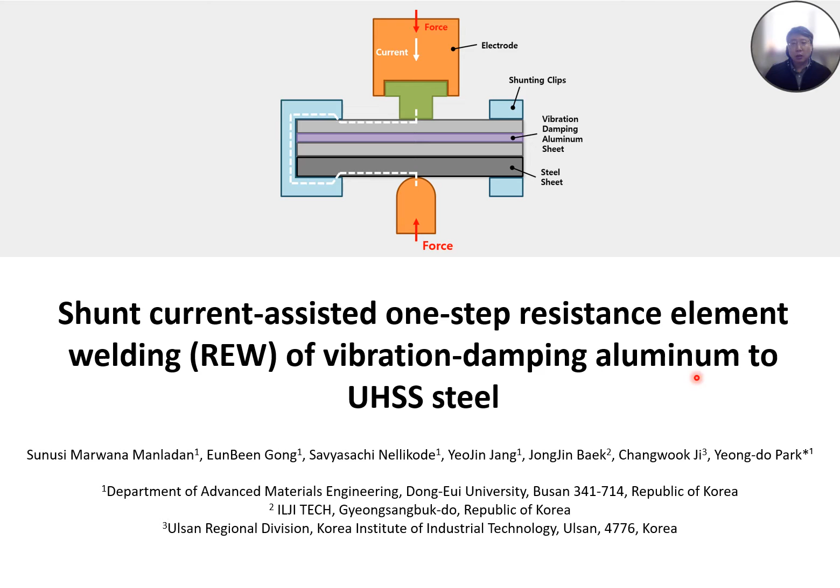Today I'm going to talk about the shunt current assisted one-step resistance element welding (REW) of the vibration damping aluminum to ultra-high strength steels.

My presentation will be composed of introduction, motivation, objective, experiments, results and discussion, and summary.

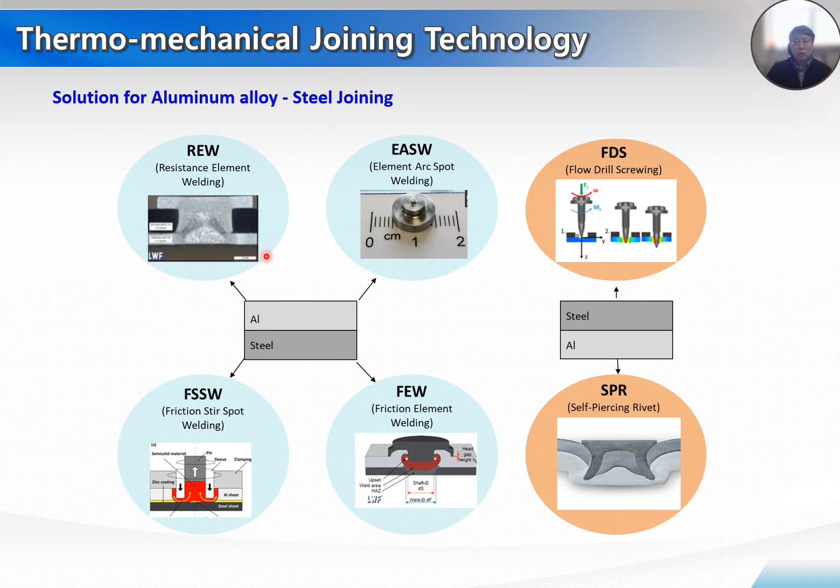Many mechanical fastening methods have been developed and applied to join aluminum and steel dissimilar materials. In particular, when aluminum is the upper plate and steel is the lower plate, the representative method is resistance element welding, and other methods such as friction element welding, FSSW, and EASW are also applicable. When steel is the upper plate, FDS or SPR can be applied. In this research, we mostly focused on the resistance element welding side.

Resistant element welding involves mechanical fastening using an element. The element is welded to the lower steel plate using the resistance welding process. Therefore, it combines the advantages of mechanical joining and thermal joining principles. It can be understood as a thermomechanical joining technology, combining the advantage of mechanical joining, which is the form fit, and thermal joining, which is the metallurgical bond. It is applicable to a wide range of dissimilar materials, such as aluminum-steel joints, magnesium-steel joints, carbon fiber reinforced plastic and steel joints, and aluminum-titanium joints.

Here, aluminum of 1.5 millimeter thickness has been joined with hot stamp steel using an element with resistance heating. The very large nugget diameter secures the bond strength between the element and steel. At the same time, the element head presses down the aluminum plate, which works as an interlocking mechanism for joint strength.

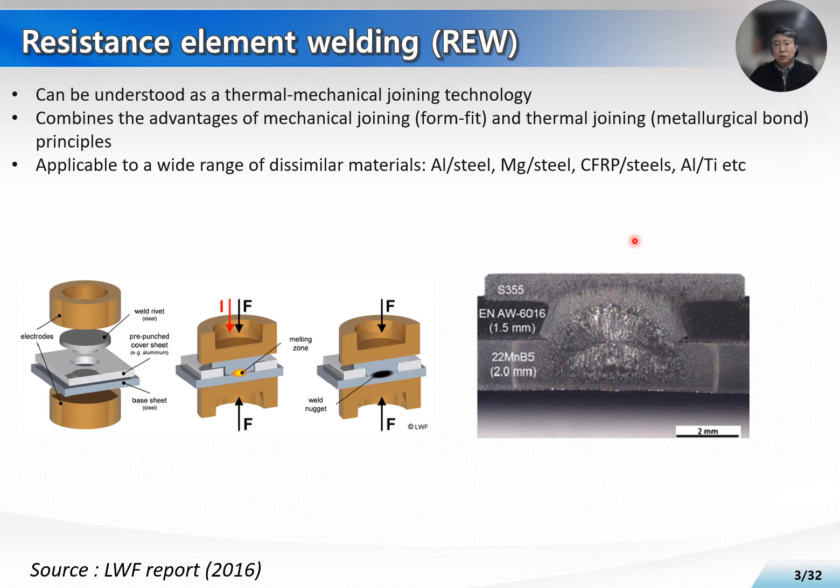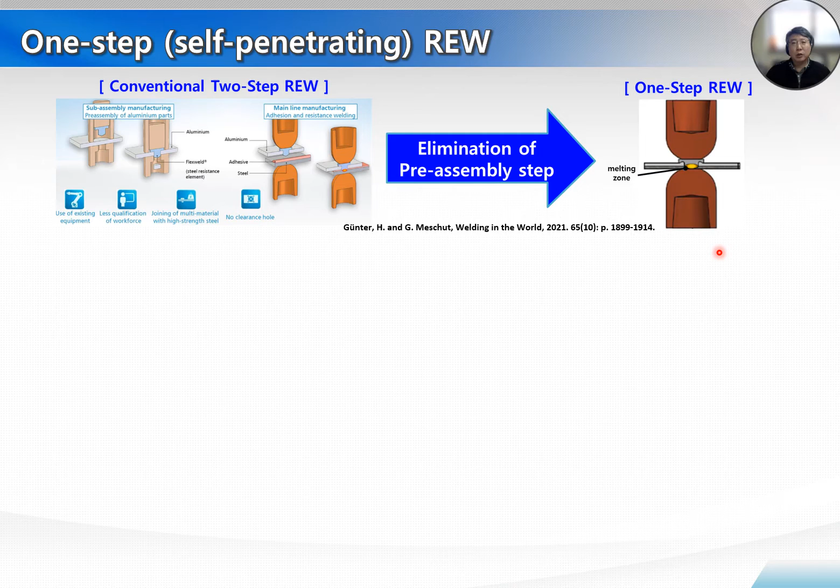Resistant element welding is a two-step process. The first is sub-assembly manufacturing, where the element is punched and inserted into the aluminum plate, and the second is mainline manufacturing, where the element and lower steel plate are resistance welded. However, in these two steps, it is difficult for a robot to find the exact location of the elements in mainline manufacturing, and the possibility of weld defects increases. Therefore, one-step REW resistance element welding was proposed, which omits the pre-assembly step and starts from mainline manufacturing by punching or piercing the element into the upper aluminum and simultaneously performing resistance welding with the lower steel in one step.

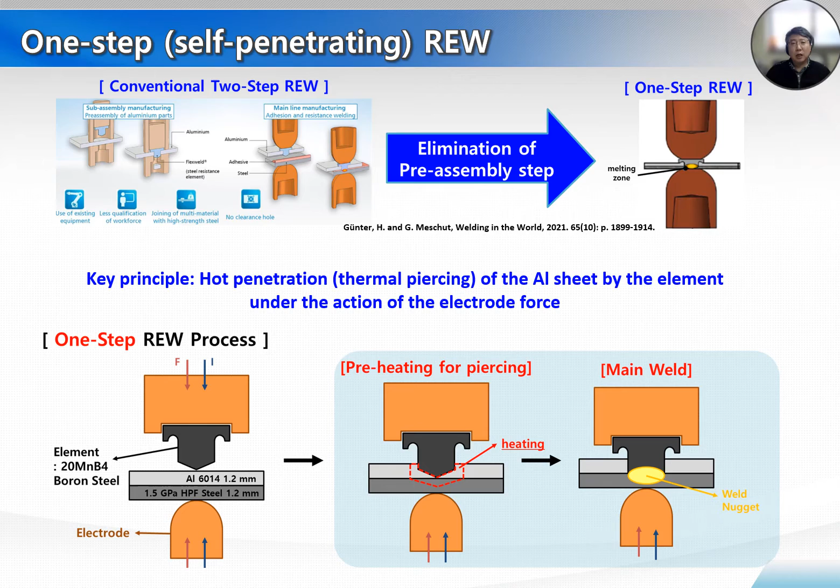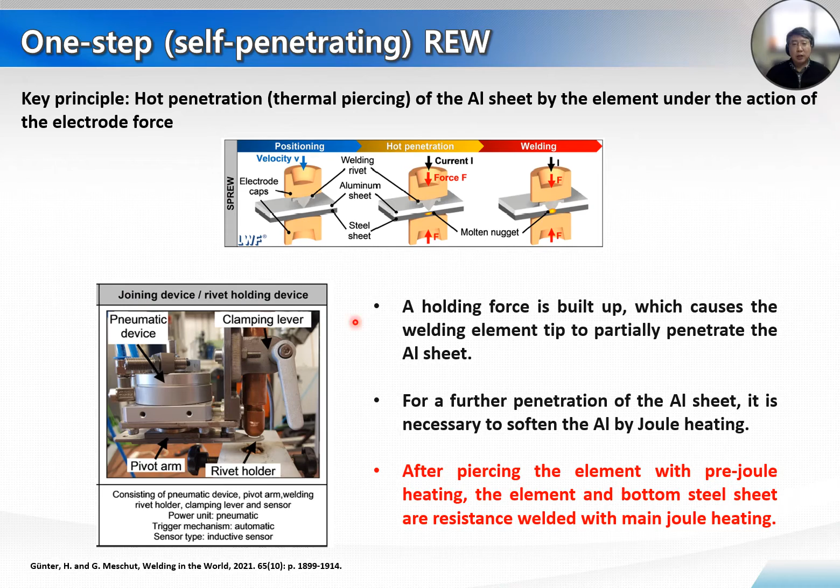In the case of one-step resistance element welding, the preheating process of aluminum sheet piercing using a special jig device and the main welding process are carried out continuously. The proposed one-step resistance element welding device consists of a variety of systems, including our existing resistance welding gun system, an element supply device, and a device that places the element onto the electrode. After piercing the element with pre-Joule heating, the element and bottom steel sheet are resistance welded with the main Joule heating. However, its use is somewhat limited to date due to the complexity of the jig system.

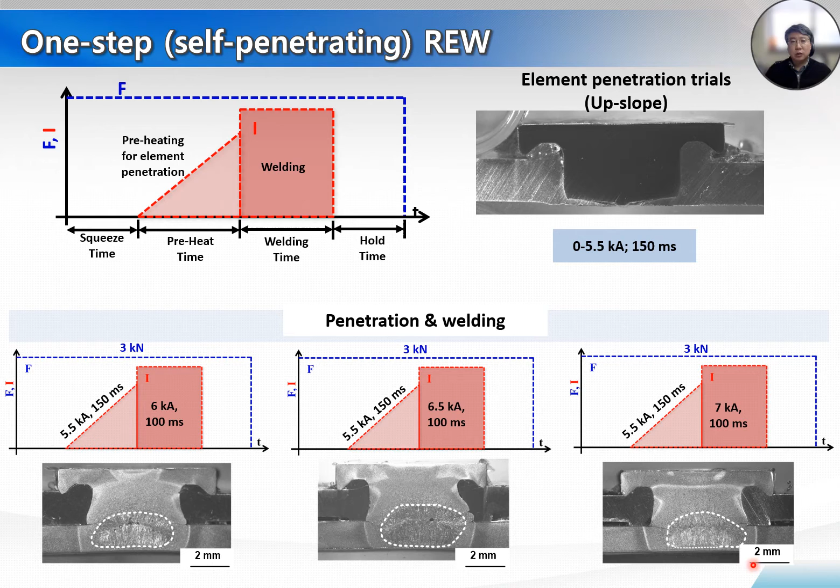In our laboratory, we also implemented a one-step resistance element welding process into a simple system. We applied the current profile of the preheating step using current upslope, as suggested in various literatures, and main welding constant current applied to secure successful fastening. In particular, when the main welding current increased, the nugget size of the resistance welding area increased and joint strength also dramatically increased.

With all this information about one-step resistance element welding in mind, here is the motivation of this research. A sandwich-structured aluminum panel with a thermoplastic layer between two aluminum sheets improves the noise, vibration, harshness properties. The assembly is made by joining this aluminum sandwich panel with thermoplastic into a steel plate. Our laboratory proposed a two-step resistance element welding process for this. However, in the two-step process, quality problems such as delamination of the sandwich panel occur during the pre-assembly step of punching the element into the upper aluminum plate.

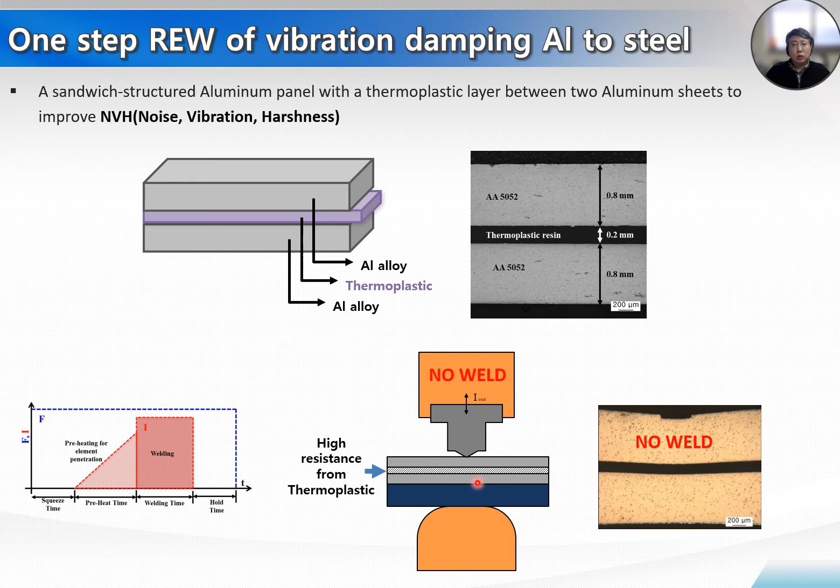So we attempted to solve this problem by applying one-step resistance element welding. However, due to the high resistance of the thermoplastic present within the sandwich panel, it was impossible to conduct current for the resistant welding.

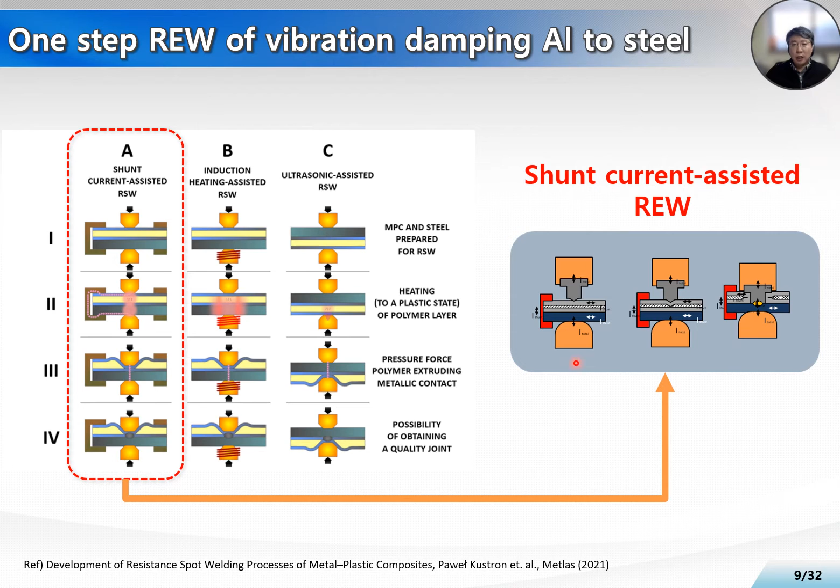Various methods were investigated to solve the problem of non-current conduction in resistant welding. In the literature, three approaches were presented: shunt current assisted resistance welding, induction heating assisted resistance welding, and ultrasonic assisted resistance welding. Among these three methods, after reviewing them, shunt current assisted resistance welding was found to be quite an appropriate approach. We finally proposed shunt current assisted resistance element welding. The following is the objective of this research.

The first objective of this research is the feasibility study of the developed shunt current assisted resistance element welding process to weld between the vibration damping aluminum and steels.

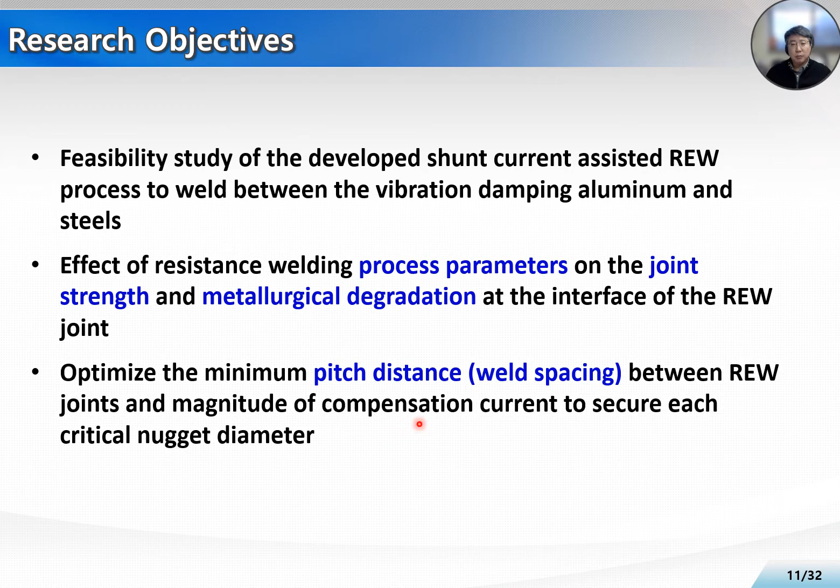Second, the effect of resistance welding process parameters on the joint strength and metallurgical degradation at the interface of the weld joint. Third, optimize the minimum pitch distance or weld spacing between the resistance element welding joints and the magnitude of the compensation current to secure each critical nugget diameter.

For the experimental approaches, vibration damping aluminum and a schematic illustration of the tensile shear test specimen has been shown here. The top sheet, vibration damping aluminum, is a total 1.8 millimeter thickness, and the thermoplastic resin has about 0.2 millimeter thickness. This sandwich type containing thermoplastic resin between two aluminum sheets is a non-conductive material mainly composed of polyethylene.

The bottom sheet is the steel with 1.5 gigapascal hot press formed, with thickness of 1.2 millimeter, and the element is 20MnB4 boron steel, with body length of 2.1 millimeter.

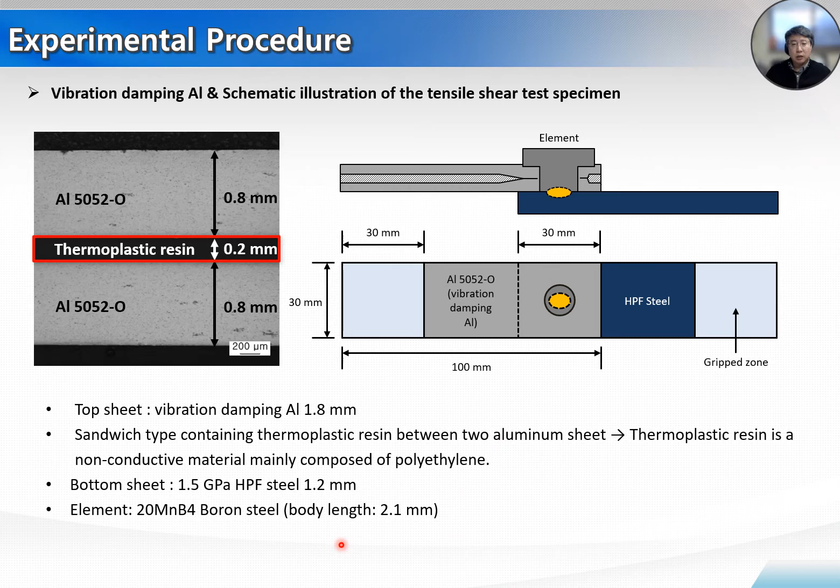To use the one-step resistance element welding process, welding is performed on the surface of the electrode, so the electrode can support the element. To form a path for current conduction, a shunting clip made of stainless steel has been implemented.

During the preheating stage of one-step resistance element welding, the temperature of the entire welding area rises with a high pressing force. As current bypasses the thermoplastic resin layer, the heat generated along the clip is bypassed through the steel plate, enabling the preheating.

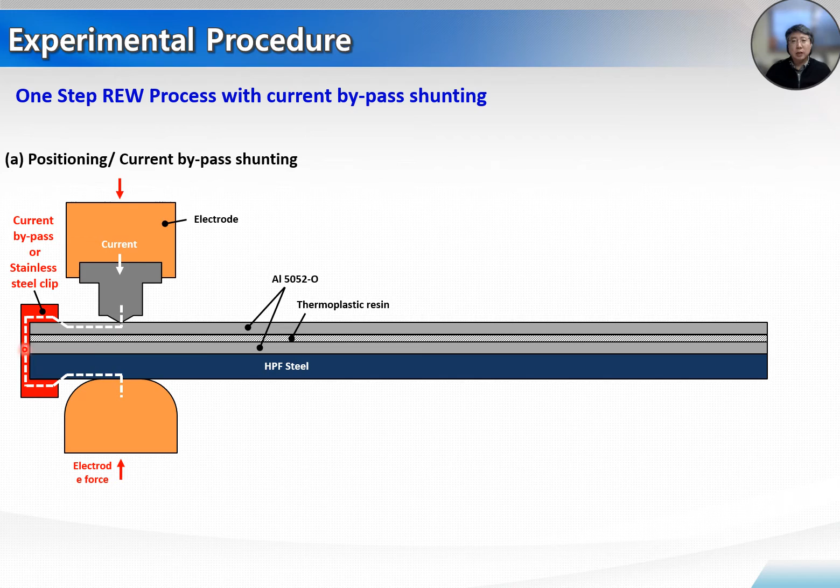There is no need to apply the shunting clip for subsequent welding points in one-step resistance element welding; the previous weld point, which is the shunt weld itself, acts as a current bypass. A second or more welding point, shunted weld, can be formed without any further clip application.

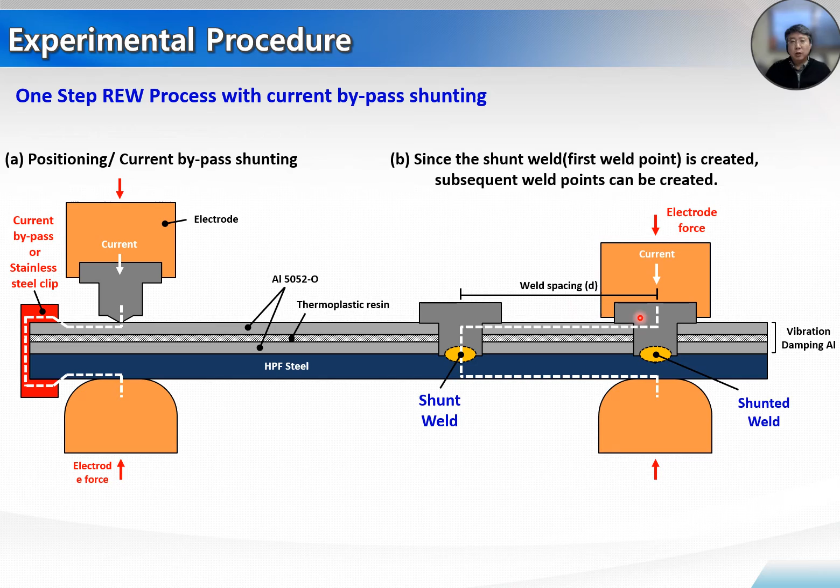For the experimental procedure for optimization of the process parameters, preheating time for piercing, which is the implementation of the optimum pulse profile, secures element press fit and makes it possible to delete the existing pre-assembly processes.

In the preheating stage, the upslope profile suppresses surface heat generation and improves the contact characteristic by applying low current at the beginning of the welding. In main welding, this induces nugget formation at the interface between the element and lower steel plates.

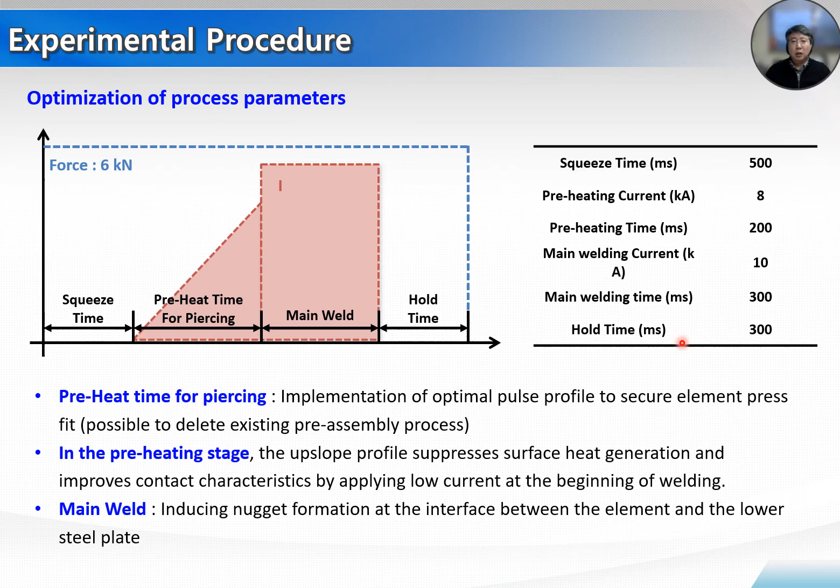The following is the suggested welding process parameters. Next are the results and discussion of this research.

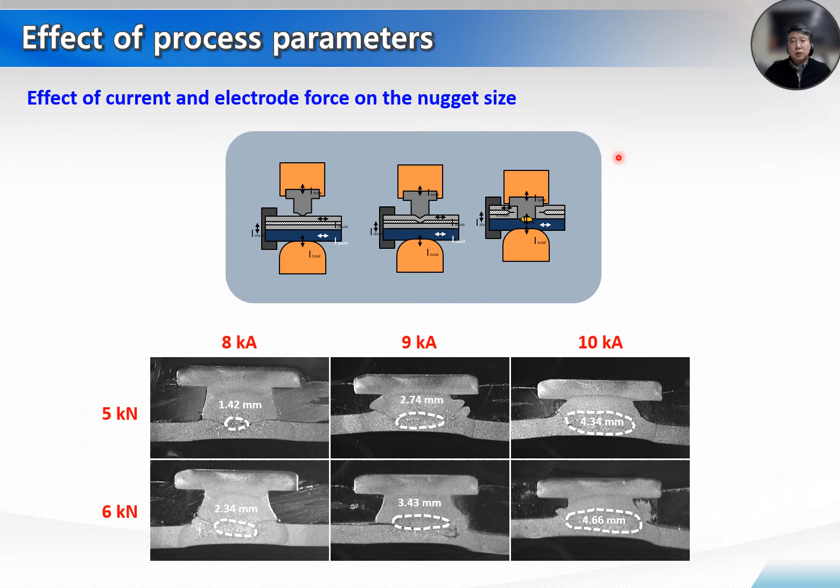When the welding current was increased from 8 kiloampere to 10 kiloampere at 5 kilonewton and 6 kilonewton pressing force, nugget diameter increased from 1.42 millimeter to 4.66 millimeter. All of this process has been accomplished with the shunting current clips, and the upslope preheating has also been applied, then main welding was done with resistance heating between the element and bottom steel sheets.

No special defects were observed in the weld area, but as the current increases, degradation of the upper aluminum near the interface was observed, possibly some melting of aluminum. At the same time, some formation of intermetallic compound can be expected, which will be explained later.

An excessive deformation of the element was also observed. This kind of excessive deformation may cause a lot of pressing down of the element, which finally lowered or degraded the joint strength of each weldment.

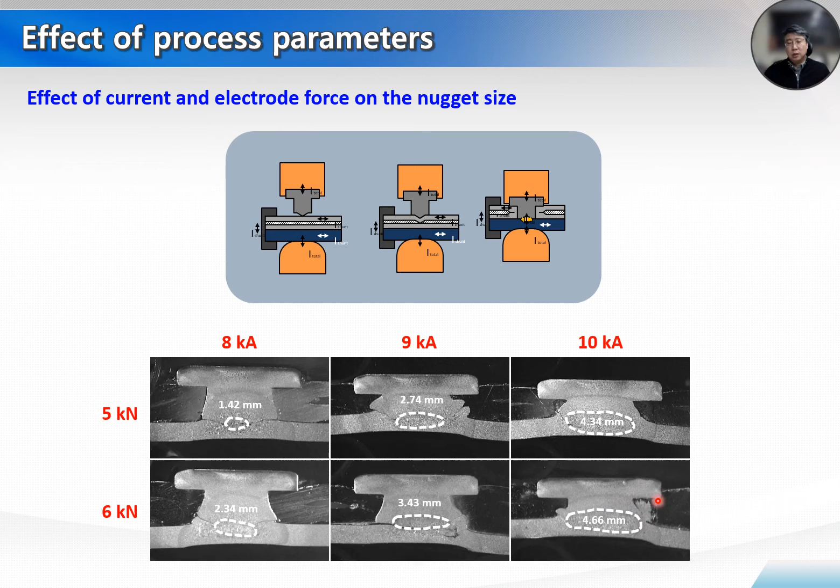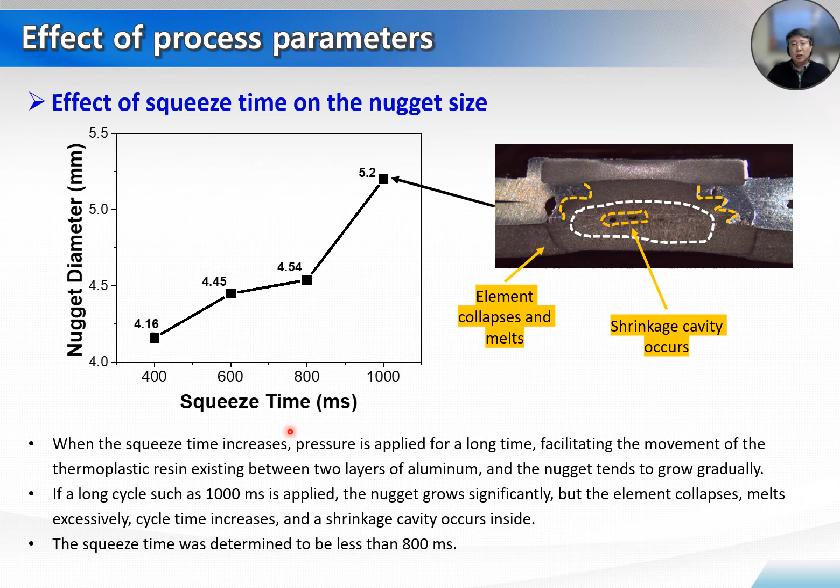The nugget tends to grow gradually. As a long cycle, such as 1000 milliseconds, is applied, the nugget grows significantly, but the element collapses and melts excessively. As the cycle time increases, shrinkage cavity also occurs inside. The squeeze time was determined to be less than 800 milliseconds; however, the mechanism of this squeeze time's effect on weld quality needs to be further investigated.

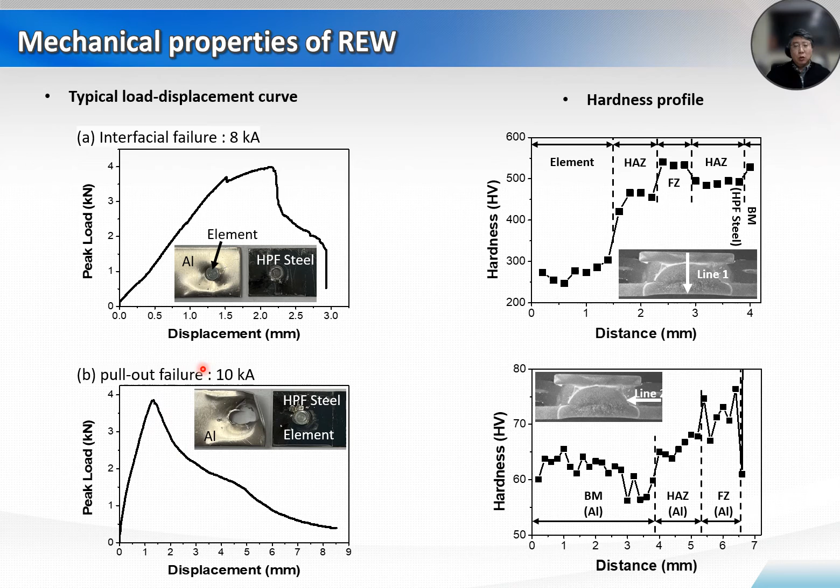By confirming the joint strength and fracture mode of this welded joint, we derived the optimal condition for securing a high-quality welded joint when applying aluminum damping plates to the one-step resistance element welding process. With a larger, higher grade thickness of aluminum applied, this result may differ, and the failure peak load will be much higher than this condition.

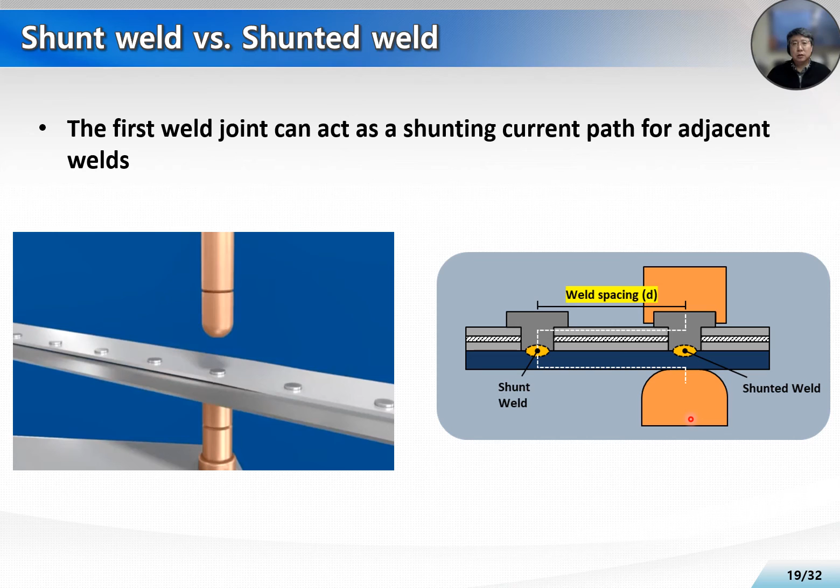In the case of joining aluminum and steel dissimilar materials in the automotive car body, welding is mostly done continuously near the first weld point in series. Therefore, the first spot weld point acts as a shunt, and a shunt clip for shunt current assisting is no longer needed. In the case of spot welds near the shunted weld, it acts as a shunt current spot weld for further one-step resistance element welding.

In order for a nearby spot weld to play the role of shunt current assisting, it is necessary to derive the minimum weld spacing distance. Additionally, a maximum weld spacing distance that does not require a compensation current value is also required.

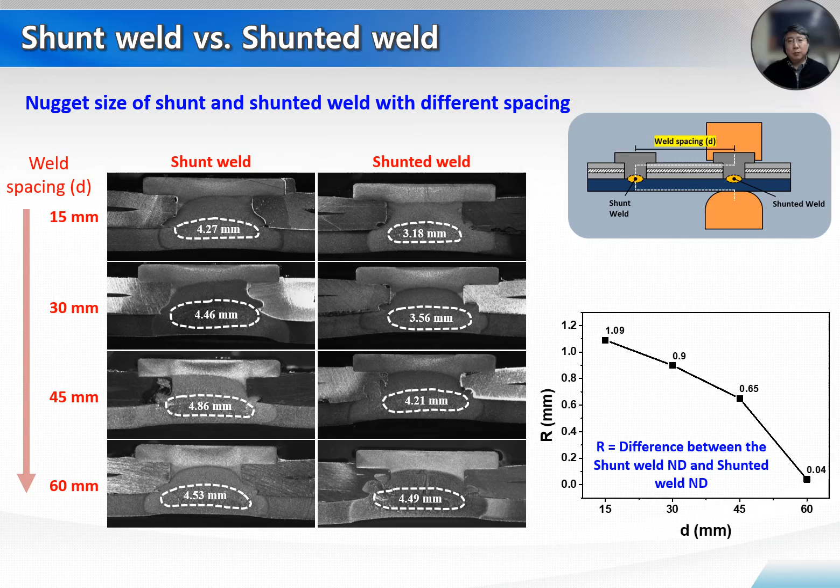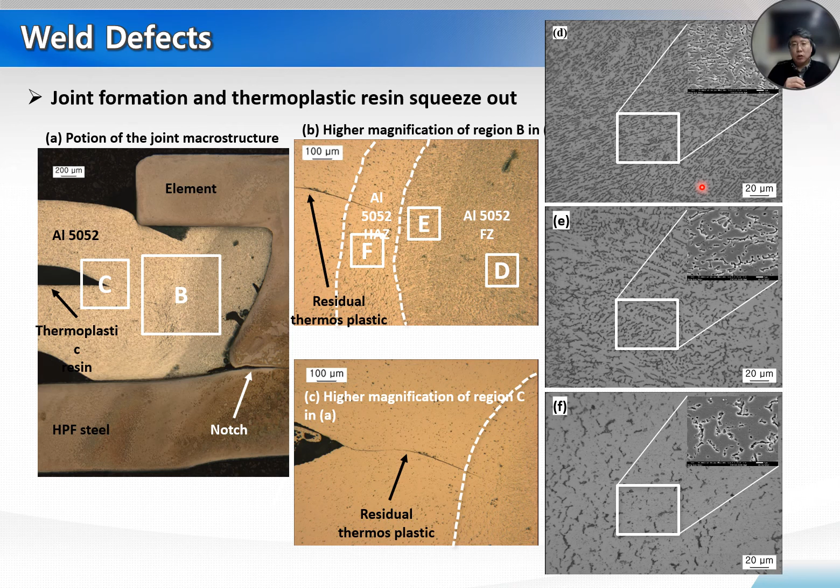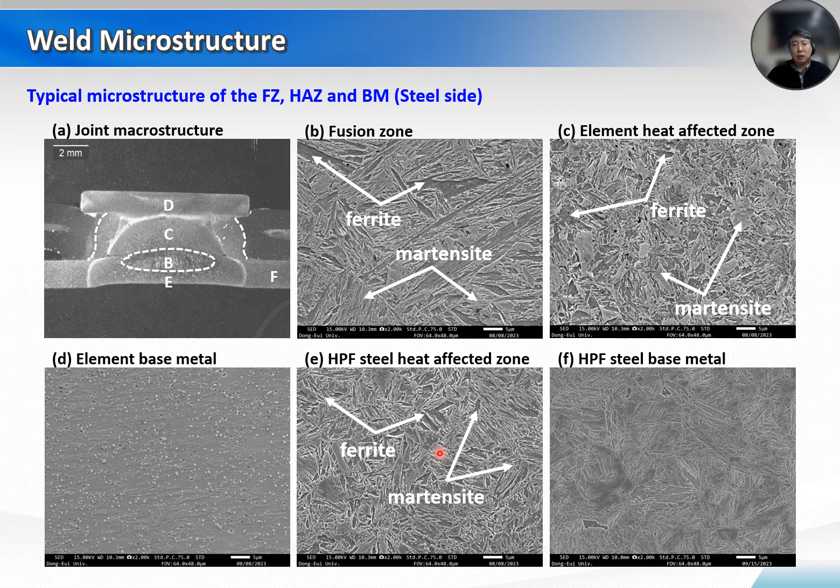Hot press forming steel and the element heat-affected zone show a low hardness value of 273 HV due to some ferrite formation, and the heat-affected zone of the element steel shows similar microstructures.

Because resistance element welding is a dissimilar material joint, the formation of intermetallic compounds, which deteriorates the property of the weld zone, actually occurs. Therefore, to analyze the intermetallic compound development, EDS line analysis was performed on the intermetallic compound part formed between the element and aluminum. There was about a 2.5 micrometer layer of intermetallic compound developed.

However, we found that it did not affect the quality of fastening due to the development of the intermetallic compound layer under the applied welding parameters. However, with excessive heat input, this may cause degradation of the joint due to very large intermetallic compound formation.